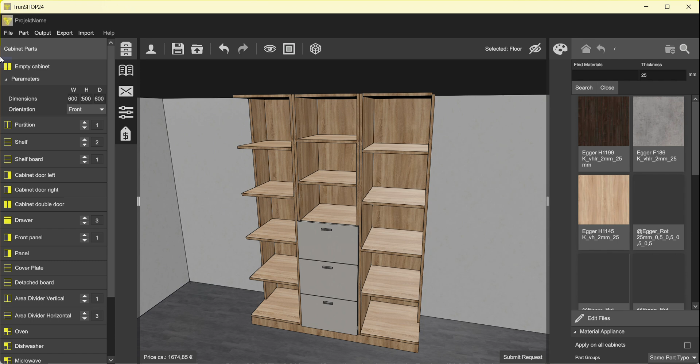In this video I'm going to be showing you how to create a shelving unit like this one with some drawers. Okay, so first thing is we're going to come here on File and start a new project, and we're not going to change the room this time.

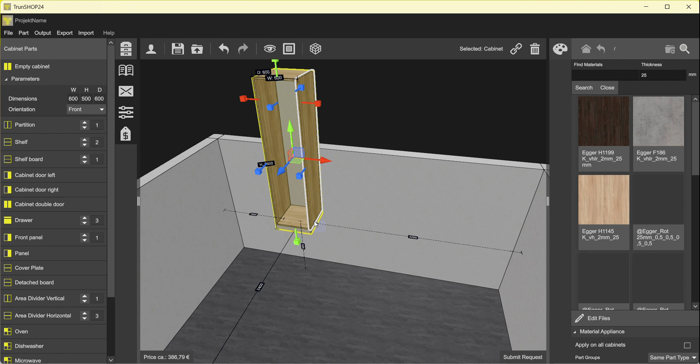Okay, so we're going to have our first cabinet 600 of width, 2,500 of height, and 600 of depth. And then we drag and drop like this, and we're just going to place two more exactly the same. So one here and one here, just like this.

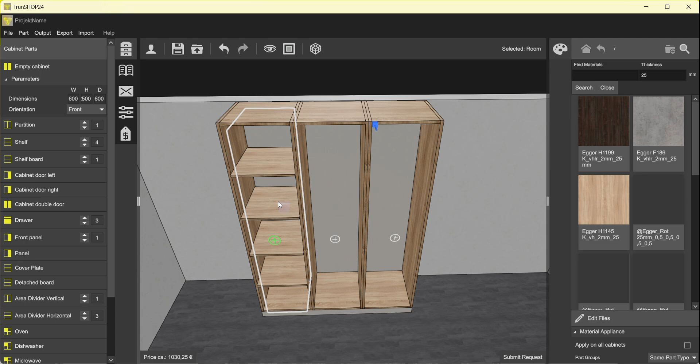Okay, now we're going to place 4 shelves on this side and 4 on the other side, and in the middle one, just one like here.

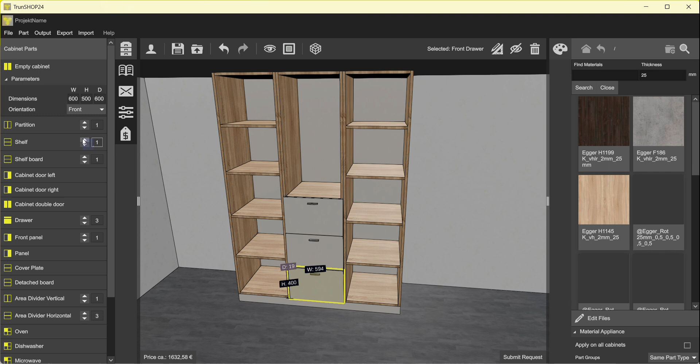Now we're going to place 3 drawers in the bottom part and 2 shelves in the top part like this. Okay, it's starting to get shape.

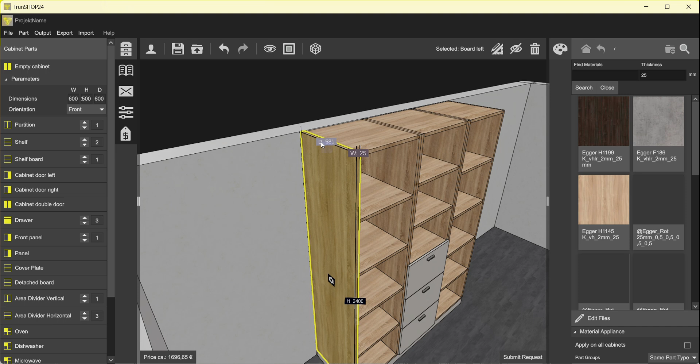Now we're going to change the depth of this piece right here. So for this we're going to click and click again. So now we have this selected, and the depth, we're going to come here, distance, overhang, and distance to the front we're going to put 300. So this piece will have a distance of 300 to the front of the piece.

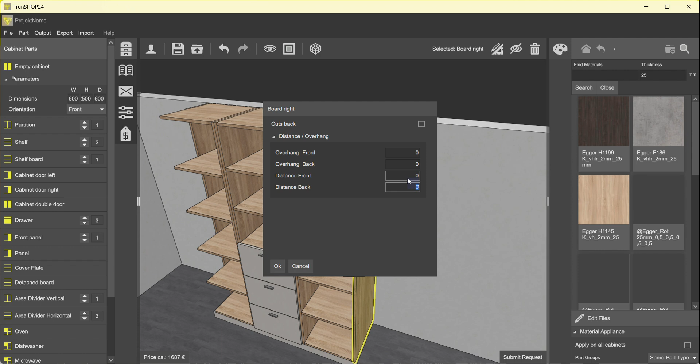So it will be like this. Okay, we're going to do the same on this side. So click again. Distance to the front 300. So as you see, you're going to have this situation here.

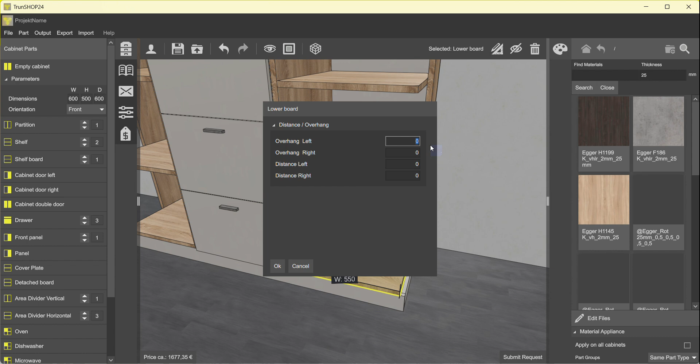It's easy to fix. So click again. So we have this piece selected, and the width, we're just going to put the distance, overhang left, in this case right, of 25.

Okay, the same on this side. So click, and overhang left this time 25.

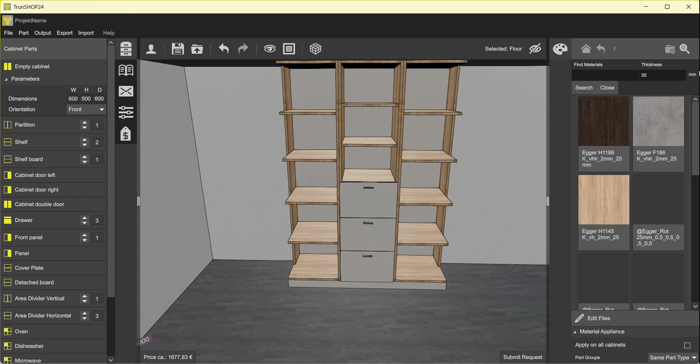Now we can change the materials here. 25, search, then we drag and drop the material, and just like that we have our shelving unit.